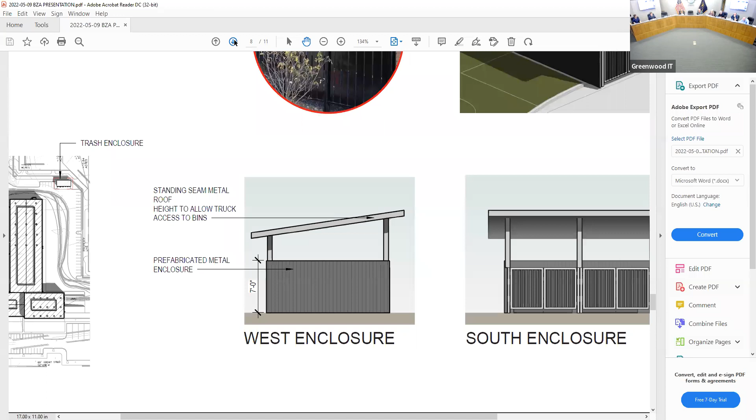Number 1, minimum of 30% transparency for the building wall on the south elevation. Number 2, minimum of 30% transparency for the building wall on the west and northwest elevation. Number 3, a minimum of 50% mortared masonry for front elevation on the south elevation. Number 4, precast concrete panels shall not exceed 50% of front elevation, again the south elevation. Number 5, overhead doors prohibited on walls facing the street right of way, which is multiple elevations. Number 6, trash receptacle enclosure shall be wood or masonry and be 12 inches above receptacle height. And number 7, the mechanical equipment shall be screened with 100% opaque materials.

All right, so Mr. Chinsky, right? And you are speaking to this one as well? I'm gonna actually have Allison here. Okay.

I probably need to have him sworn in again for this. Okay, you're going to speak, yes. Whoever is going to speak on behalf of this, please stand, raise your right hand and be sworn in by the secretary.

And name and address for the record. My name is Allison Luzuck. I work for HOK out of St. Louis. Address is 200 South Broadway in St. Louis, Missouri. Okay, so we have 7 very distinct requests here.

Yes. So I will have you give us an overview of all of it, because they do tie in together when we go through the statutory criteria, to try to avoid repeating the same thing over and over. I know some of the answers are slightly different, but I will have you try to answer them collectively one time, if that works for you. That does, because it's a lot.

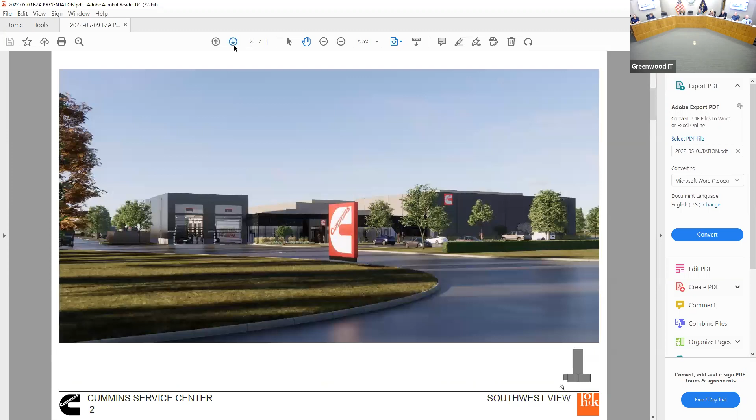The first two variances have to do with transparency requirements on our front elevations. This is our southern elevation. We hit about 20% transparency, largely due to the warehouse component. We studied putting glazing on that, but my understanding of the regulations was that you were trying to create a cohesive, nice looking building, and that warehouse will have interior shelves. With exterior glazing, you'd be looking at the backs of boxes, which we didn't think would be ideal. To offset that, the whole block has skylights so workers still receive ample natural light, and we felt this was a better aesthetic solution than windows that wouldn't ultimately be used.

To offset that, we paid special attention to this retail facade: a storefront glass system with a metal design element, a specialized metal entry vestibule, and for the immediate assessment bay to the left, we're featuring high quality overhead doors and specialized polycarbonate panels above that will glow at night and look nice from the exterior. So that is the south facade.

The west facade, we also achieved about 20% glazing. I think this is largely due to the overhead doors we selected for functional purposes. Again, the intention is that these are good quality metal matching the aesthetic of the building. However, we wanted to keep them solid toward the bottom to avoid damage from trucks potentially hitting them, which was more consistent with the use of the building.

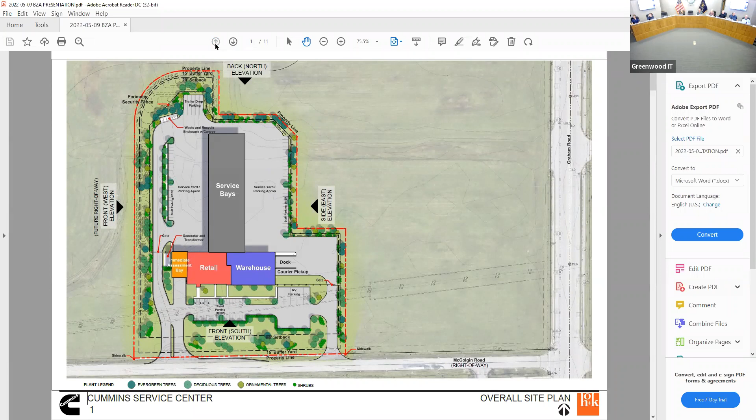Precast allowed me a little more flexibility. You can see the lines on the facade are reveals, and there are also some setbacks in the plane, so it's not just one flat plane of precast. The strip at the bottom is going to be a textured, striated precast of a slightly different color. It's also the intent that this is a high quality precast with a good finish, not the gray concrete-looking precast. It's a finished product.

So that covers the next two, I'm at four. I think Mark addressed overhead doors to an extent. That is our building program. To offset that, our intention is to use good quality overhead doors — they won't just be solid metal. The overhead doors at the immediate assessment bay will be all glazing, even to the extent that I'm working with the supplier to avoid vertical mullions to give them a cleaner look.

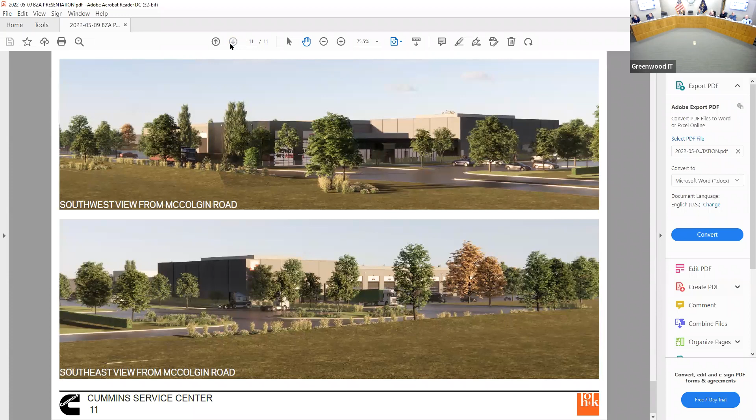We've introduced glazing to the extent that we could on the service bay elevations. Again, because of the orientation of our building, almost every facade is a front facade, so it was essentially unavoidable to have it facing a street. We have landscape buffering and are willing to go above and beyond to help buffer that from view. I have some views to show our intent. We don't want this to be imposing or distracting — I really hope it's just a simple design that works well in the area.

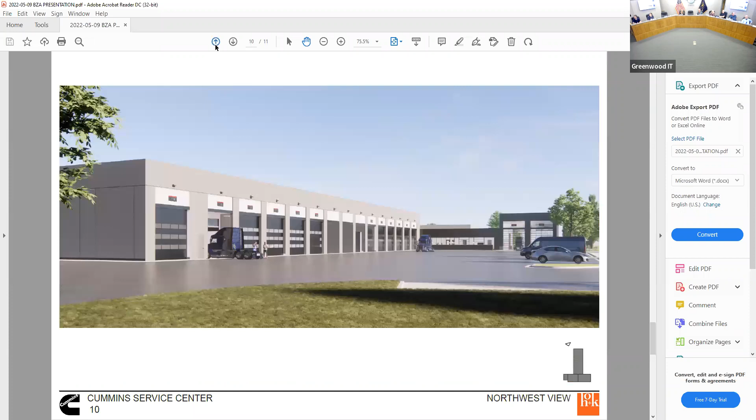Dumpster screening was brought up. The code states to use wood or masonry. As we did not propose using those building elements elsewhere, we thought it would not be consistent to use them for the dumpster enclosure, so we're proposing a metal screen consistent with the materials we're using elsewhere. We did add a roof — we thought that would be more agreeable and essentially completely screen the dumpsters. Right now it's about 15 feet high, so the trash trucks can get the bins out without having to pull them out, so the bins can hopefully stay in there and really just reduce visibility as much as possible. We're still working through the details to make sure it's acceptable from an operational and fire perspective.

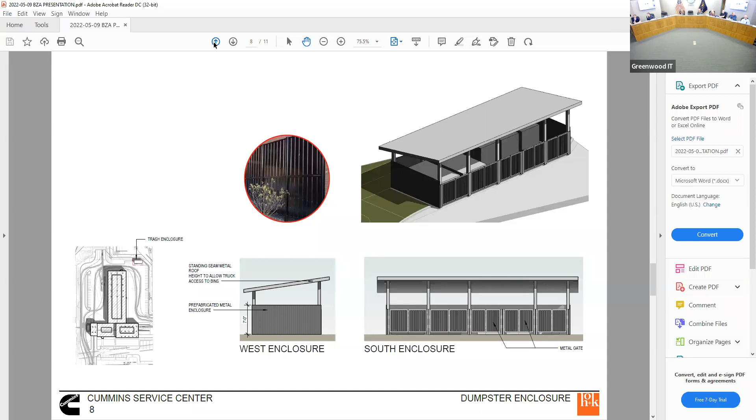The last one had to do with rooftop screening. Please correct me if I interpreted the code wrong, but the goal is that no mechanical units or rooftop screening are visible at all from the rights of way. We're still working through mechanical and don't know the heights of those units, but we do intend to fully screen them. I included this to make sure it was addressed. Because of our building height and location, with the interstate elevated and flat plane, it wasn't going to be possible to keep them completely obstructed from view. But we have all the screening set back a minimum of 25 feet from the front facade, so it's not part of the main facade when you view it. My goal is that it's as least obstructive as possible. Okay, I think I got it all.

Very good. Anyone else, Mr. Nelson?

It does seem like a lot of variances, but I think they all sort of blend together. The trash enclosure is to match the building — the lack of masonry is being replaced by panels like we have on the field house here, so those two kind of go together. The nature of the business is really what brings in those overhead doors — without the overhead doors, you don't have the special exception use. With that, I believe the rooftop screening is looking at a perforated metal, which wouldn't totally be 100%, could be something like 98%. It was my understanding it was the metal with small holes in it, but I could have misinterpreted that. With that, staff is supportive of the variances.

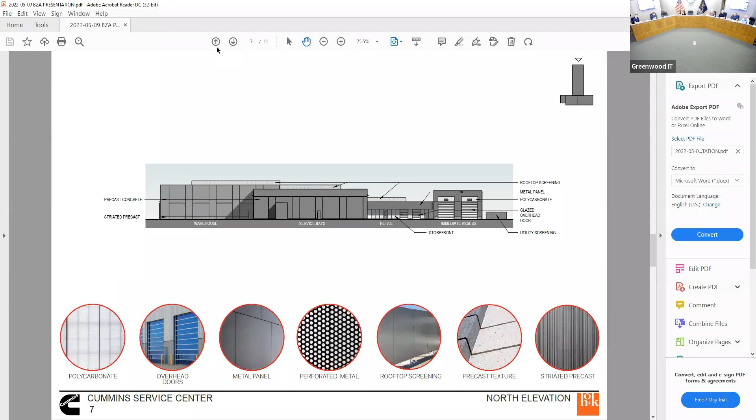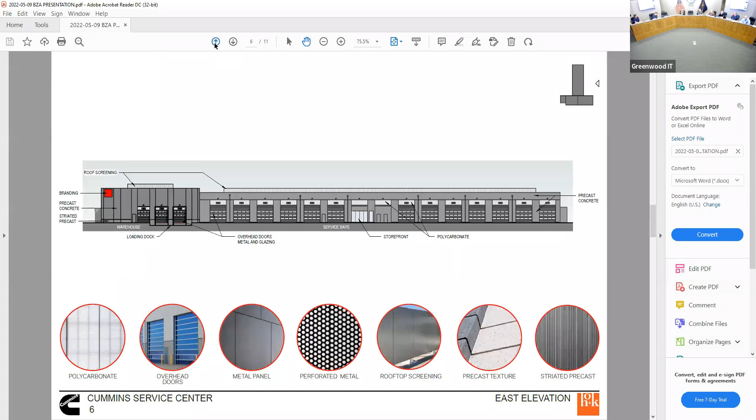Chairman, I motion that we approve that request with the conditions indicated by the staff report. And that is all 4 of them. A motion to approve with the 4 conditions. Second by Mr. King. All those in favor, raise your right hand. All opposed, same sign. Motion carries 4-1.

And a motion on number 2, which is a minimum of 30% transparency for building wall, west and northwest elevation. I move that we approve with the 4 listed conditions. Motion approved with 4 conditions by Mr. King, second by Mr. Mole. All those in favor, raise your right hand. All opposed, same sign. Motion carries 4-1.

Number 3, the minimum 50% mortared masonry for the front elevation, which is south elevation. No question. This is one of those that there was no practical difficulty.

Chairman, I recommend that we deny this request. Motion by Mr. Peters to deny that request. Second by Mr. Polar. All those in favor, raise your right hand, in favor of the denial. All opposed, same sign. Motion carries 5-0.

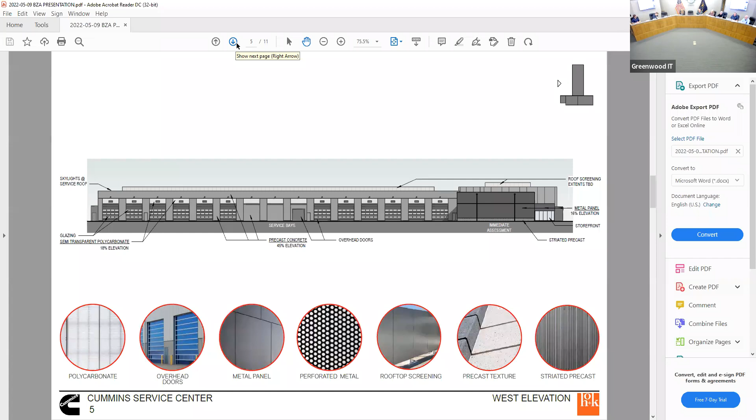Number 6, trash receptacle enclosure shall be wood or masonry and be 12 inches above the receptacle height. Chairman, I motion that we deny this request. Motion to deny, second by Mr. Fuller. All those in favor, raise your right hand. All opposed, same sign. Motion carried.

Sorry, it was a motion to deny the request, by Mr. Peters and seconded by Mr. Fuller. The vote for the denial was 3-2, and the ayes for that motion were Peters, myself, and Fuller.

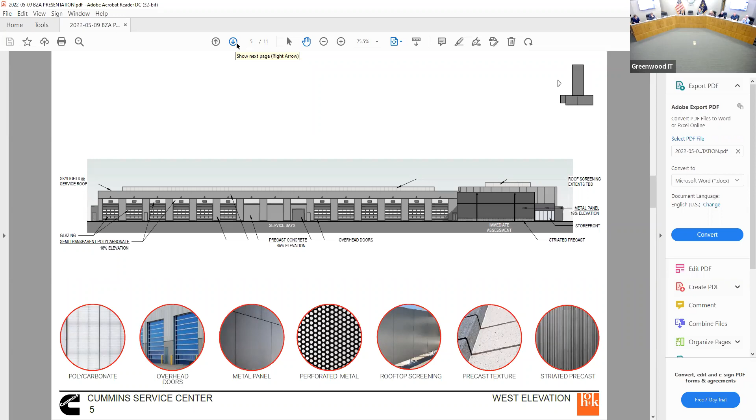I'll take a motion to direct the Corporation Counsel to draft written findings of fact. Chairman, having considered the statutory criteria, I move that we direct the Corporation Counsel's office to draft written findings of fact regarding our decision on the variance request presented, variance petition number BZA 2022-010, said findings to specifically incorporate the staff report and the evidence submitted into the record for consideration and adoption by the Board of Zoning Appeals as a final decision, final action regarding this petition at our next meeting. Motion by Ms. Peters, second by Mr. Fuller. All those in favor, raise your right hand. All opposed, same sign. That motion carries 5-0.

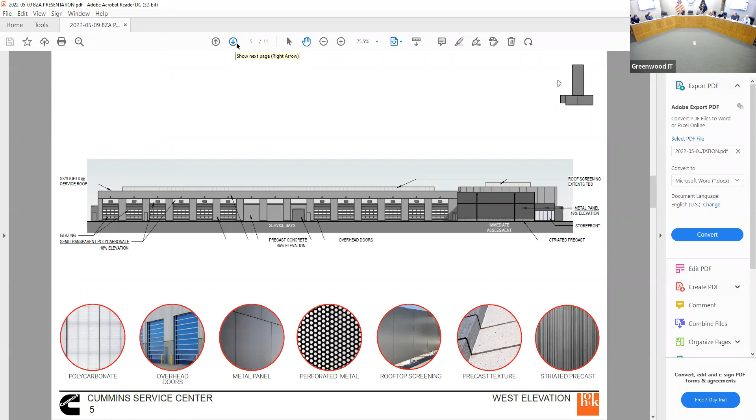Thank you very much. All right, we move on to BZA 2022-11, Developmental Standards Variance for Greenwood Parks and Recreation, requesting relief from Unified Development Ordinance Section 10-3-8 for signage. On-premise signs allowed by permit: 2 building wall signs, maximum face area 200 square feet. They're requesting a 216.75 square foot wall sign for the new Greenwood Fieldhouse.

All those wishing to speak to this docket, please stand and be sworn in.

Who is presenting? The presenter is not here. So, in consideration of time and not having a presenter, I would ask that we make a motion to continue it. I do believe they're adding another sign to that wall, so we can amend the request to go forward with that at a different meeting.

What is the date that you are continuing it to? What's our schedule look like for our next session? The next session already has a pretty full agenda. The next meeting would be after May 23rd, so it would be June 13th.